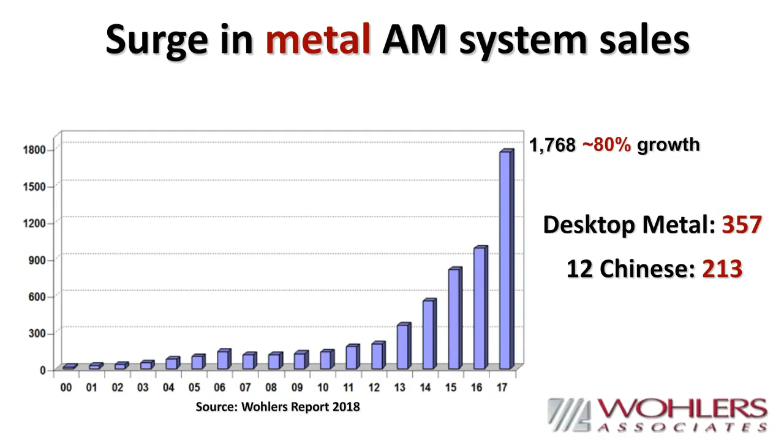Now, I should say that of the 1,768 systems, 213 came from 12 Chinese companies that did not report sales the year before. So they definitely contributed to the total. And then likewise, Desktop Metal, which is a relatively new company in this space, reported sales for the first time last year. So combined, they contributed quite a lot to the total sales. Still, growth of 2.2 times in the past 2 years is quite good, and then nearly 9 times in the past 5 years. So it really is on an interesting growth trajectory.

Now, when looking at metal additive manufacturing, or even additive manufacturing in general for production quantities, some organizations will underestimate the importance of design and how it contributes to the idea of using the technology for production in quantities of a few to hundreds, even thousands of parts. One element of design for AM is part consolidation, as Alan mentioned with the GE engine.

This is a much more simple example, but one that may not be obvious to many organizations, where you would normally have several parts and then you would connect them with fasteners. And the reason they are assembled this way is because that's the way the parts need to be manufactured using conventional methods of manufacturing.

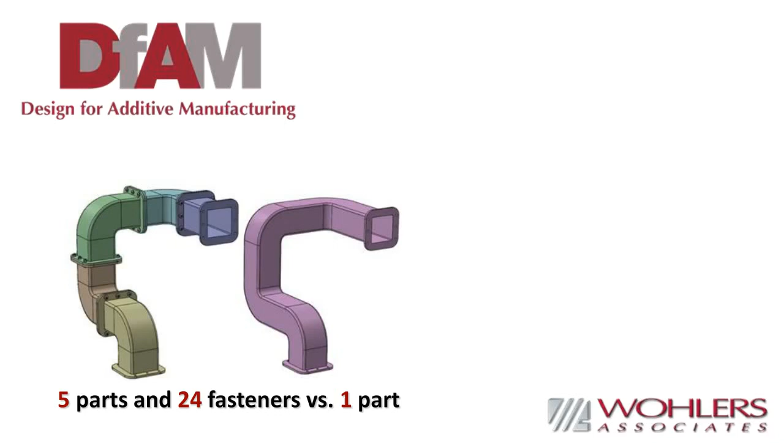With additive manufacturing, of course, you can do parts of high complexity, and so you can consolidate these parts digitally, eliminating many parts and fasteners and coming up with one part number, one part, and of course that reduces inventory, assembly, labor, potentially maintenance, and so forth, and can really have a dramatic impact on one's business.

This is an example of a seat bracket, or mount rather, for an aircraft. This would be a passenger seat, and the version on the left is conventionally machined. It was given to our associate consultant, Olaf Diegel, who then optimized it using topology optimization, which is really letting mathematics decide where to put the material to optimize the strength to weight ratio.

And you come up with a very sort of rough organic shape, the one pictured in the middle, and then ultimately the picture on the right. And what this did is it reduced material by 75%, yet preserved the strength, and it reduced weight by 25%. Well, why 75% material? If you were to put a bounding box around the machined version, you would machine away most of the material to get to that part. But even so, the part itself is fairly optimized in terms of weight, and that's why the weight reduction was 25% from the version on the left to the far right.

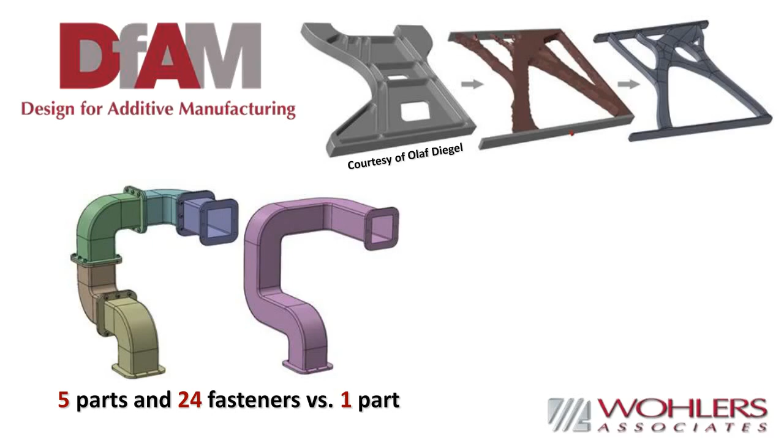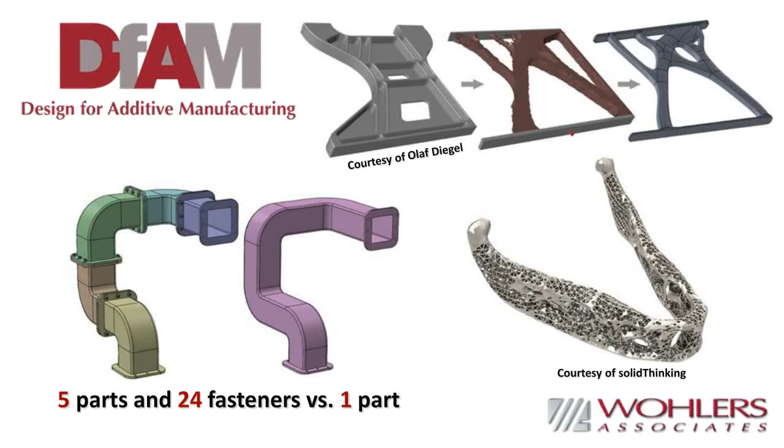But these are the kinds of techniques and methodologies that companies are beginning to think about, but have relatively little experience with. And then this is taking it even a step further, where you're combining topology optimization with lattice, mesh, or cellular type structures to come up with a design that you see here. And this is a jaw implant for a medical application. And so these are the kinds of things that companies really need to begin to look at to justify the use of AM for production.

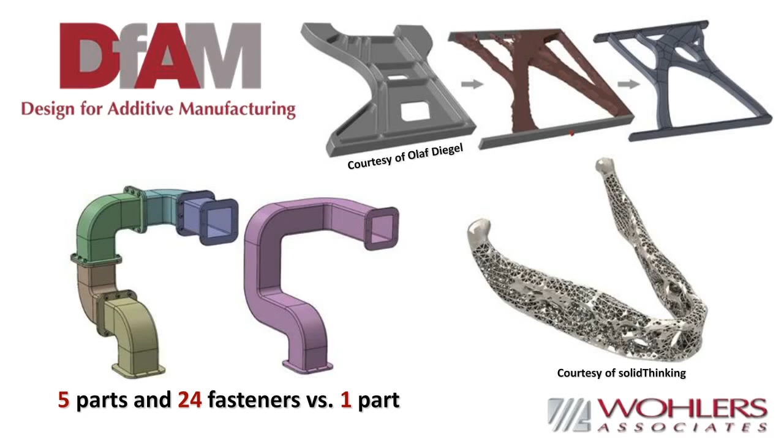Something that is often overlooked is the cost associated with pre- and post-processing. And so we did that. We asked 92 companies in 26 countries, what are your costs associated with pre- and post-processing? And this is what they told us. The actual printing of a part, and this is metal AM, is about 54% of the cost, and about 1/3 is post-processing.

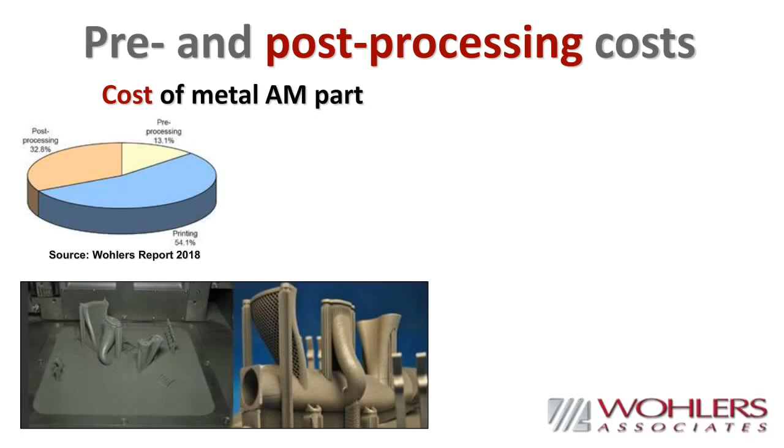An initiative in Germany where Premium AEROTEC, a wholly owned subsidiary of Airbus, Daimler, and EOS got together, and they determined that pre- and post-processing can represent as much as 70% of the total cost of a metal AM part. So it's significant, and one that really shouldn't be overlooked.

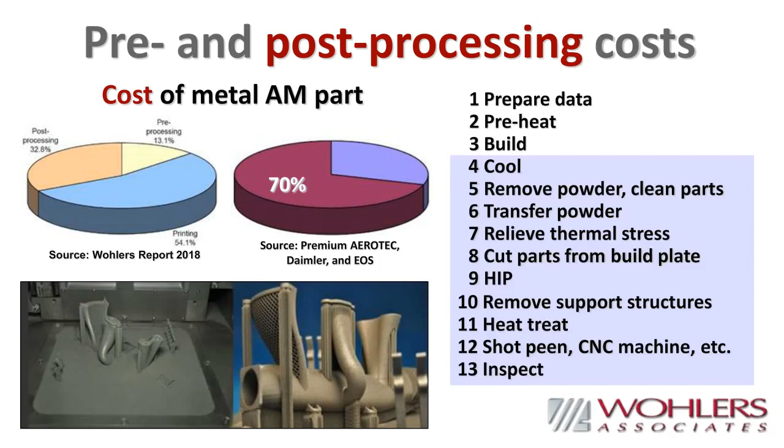The pictures in the bottom, the one on the right, show the support structures, the anchors that anchor the parts down to the build plate, and it transfers the heat, and it prevents the parts from distorting. Because there's lots of heat and residual stresses that build up in the part, you have to take that as you see it there and do a heat stress relief to relieve these stresses before removing these structures from the part. Otherwise, the part will distort. And that's just an example of some of the post-processing that occurs.

And this is a fairly long list, but not even comprehensive. The highlighted part in blue are the post-processing steps, and they could be even longer. These are for really aerospace quality type parts. The first three steps, especially the first one, could be divided into as many as 5, even 8 additional steps. But it hopefully gives you an appreciation for everything that goes on.

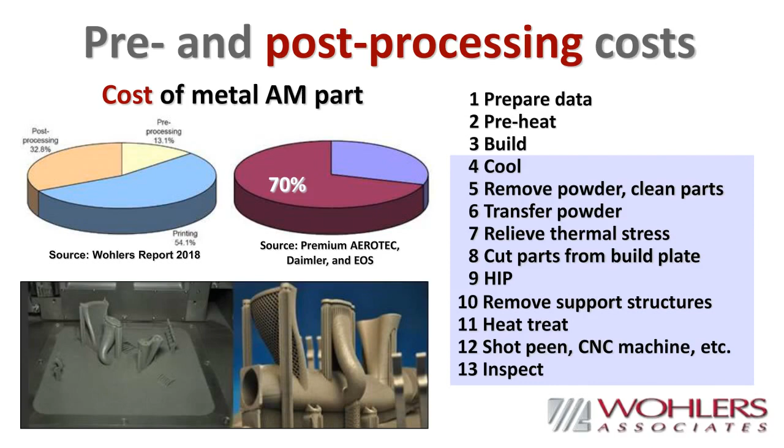The build, step 3, is a very important part, but it's just one part of everything that goes on to building metal parts. And I'm sure Chris will expand on some of this and maybe give a little more color and elaborate on what all goes on in producing good quality parts.

Here's an example of a machined manifold, a simple manifold on the left. Then it works its way to the right where you have an additive type part. And so you can see the difference in the two in terms of weight.

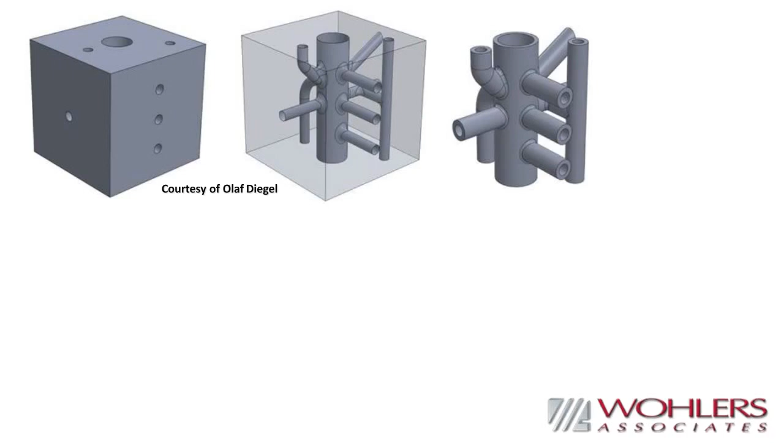Now, part orientation is a key factor, so you might rotate it as you see it here. But that doesn't really solve much; you want to reduce the supports to a minimum. No supports would be great, but you usually can't get by without any. So you want to keep them to a minimum, but you have to have a sufficient number of them, because that's metal against metal, welded to metal, and that has to be cut away somehow, ground away.

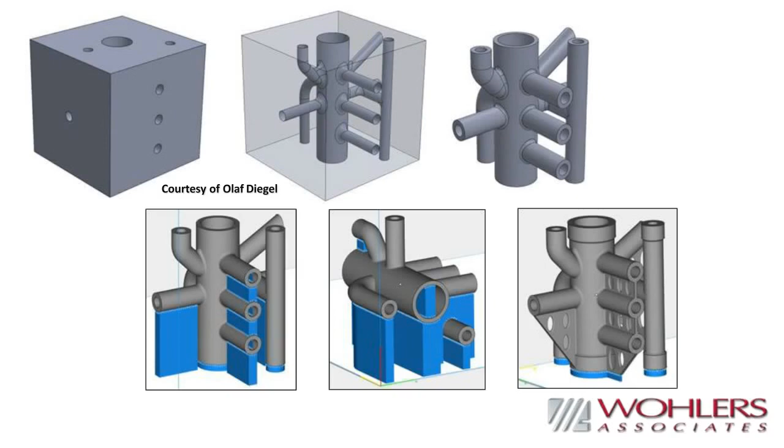So how about if you do this? How about if you replace those support structures with features? In fact, what is normally round, you make oval, so that way you don't need supports in the round holes and slots. So there are techniques that can be done to reduce the amount of support material to a minimum.

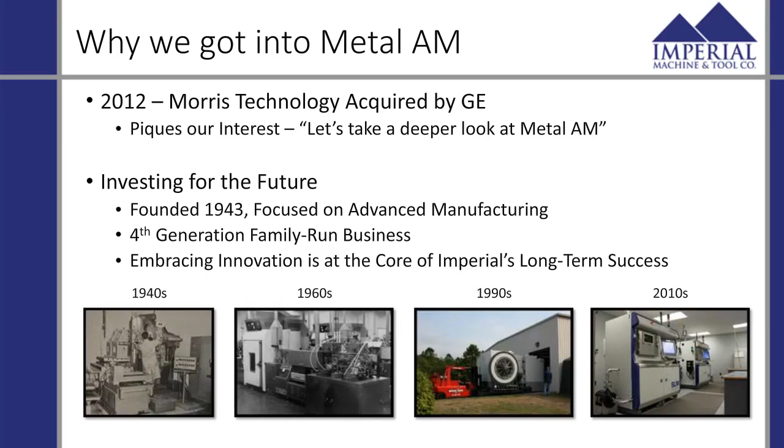So as we started to look into it, as I mentioned, we were founded in 1943. We're focused on advanced manufacturing and really have been since the very beginning. My grandfather was an early adopter of precision jig boring in the 40s and 50s. My dad got into CNC machining in the 60s and 70s. So in short, embracing innovation is really at the core of our long-term success. It's really what has set us apart.

And our customers are typically those folks that are specializing in the innovation space. Very common for us to talk to scientists, engineers at the top level, to work on new designs and understanding how we can try something that is going to give folks an advantage in their market. So really our markets have always been dealing with a lot of the leading innovators. So that got us into metal AM and trying to understand a little bit more about how it would impact our customers directly.

So back in 2012 or 2013, we bought our first machine, got it on the shop floor, and the hype at the time said you just press print and out come these magical parts. We were certainly immediately brought up short on that because that's not the case. There is a lot that goes into it, as Terry just mentioned, from the pre-processing all the way through to post-processing.

And really what it has evolved into is a much closer relationship between us and our customers. Additive almost calls out for a close alliance between the vendor and the customer. As I'm sure most of the folks on the phone are aware, for decades, customers would prepare a technical data package, they'd put it out on the street, and 5 or more folks would compete for that.

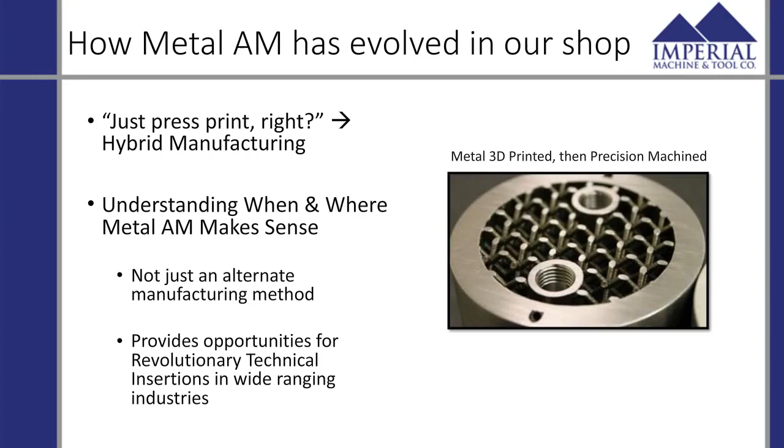That much being said, this provides opportunities for revolutionary technical insertions in wide-ranging industries, primarily for the reasons that I just said. You can use internal structures to accomplish things that have never been done in the past. So, as I talk about how metal AM has evolved in our shop, we realized early on that hybrid manufacturing is really the key to this thing. As Terry indicated, the vast majority of the work here is done in the subtractive shop.

When I realized that, wait a second, yeah, we can build these new and great and cool structures, but when I want to finish them, I'm going to put them up on my CNCs, and we're going to machine O-ring grooves, and we're going to machine flat and parallel surfaces, and we're going to be machining every interface dimension. So really, it's a very, very complementary technology for the vast majority of advanced machine shops out there.

So when we got to improving AM processes, we really started to focus on how to gear these for production. How can we make these tools repeatable? Because ultimately, the most important thing for me is to sell like we've been selling for 75 years. I have to see the ability to repeat these structures. They have to be repeatable and verifiable, just like everything we've made for 75 years.

In the past, somebody's chosen bar stock. We get the certs for that. We manufacture the pieces. We inspect them post-fact. We submit those inspection data as well as the certs. That's how our industry runs. As additive starts to slowly coincide with that capability, additive is going to continue to build out. But it is really when additive can adapt itself to industry, as opposed to industry adapting to additive, which is also important.

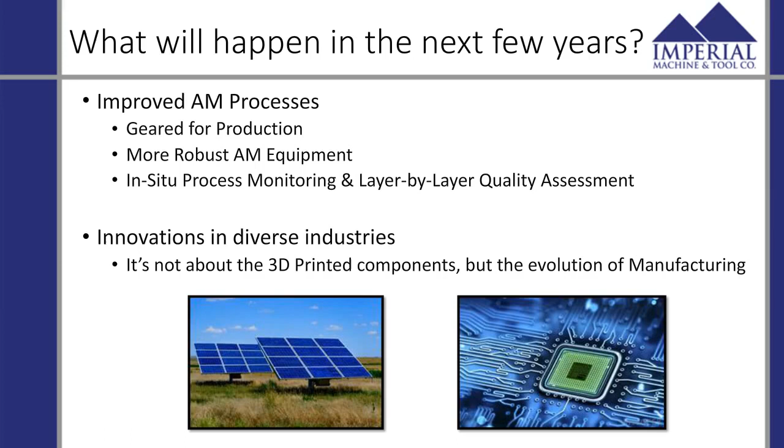But then you look at things like tables and chairs and desks and so forth, and wall accessories, and they really don't look like good candidates for additive manufacturing. But I wouldn't draw conclusions too quickly. Certainly for the lower volume specialty, one-of-a-kind types of products, I've sat in chairs and sat at tables that have been 3D printed. Which, by the way, the terms 3D printing and additive manufacturing are used interchangeably here.